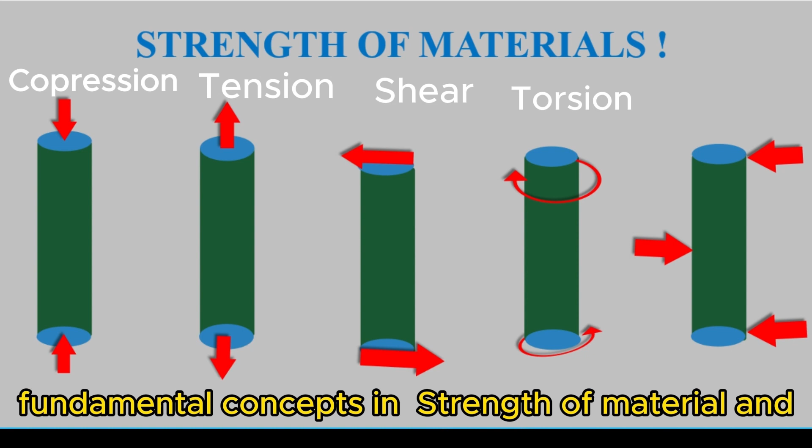Today we are going to see what strength of materials is, fundamental concepts in strength of materials, and finally its application area. I hope you will get important tips about the subject.

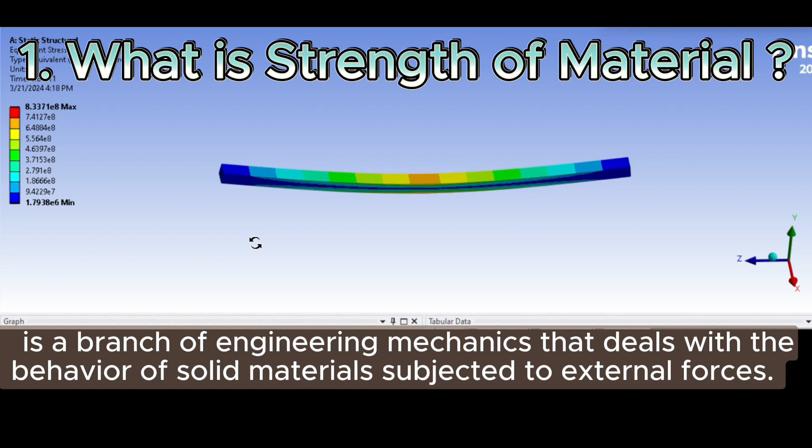In the first section we will see what is strength of materials. Strength of materials is also known as mechanics of materials. It is a branch of engineering mechanics that deals with the behavior of solid materials subjected to external forces. It focuses on understanding how materials respond to loads and stresses and how they deform and fail under different conditions.

The primary objective of strength of materials is to analyze the internal stresses and strain within a material and assess its structural integrity and performance.

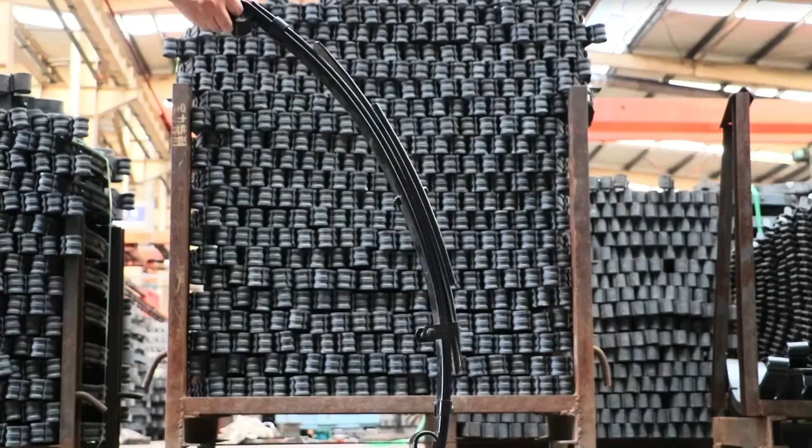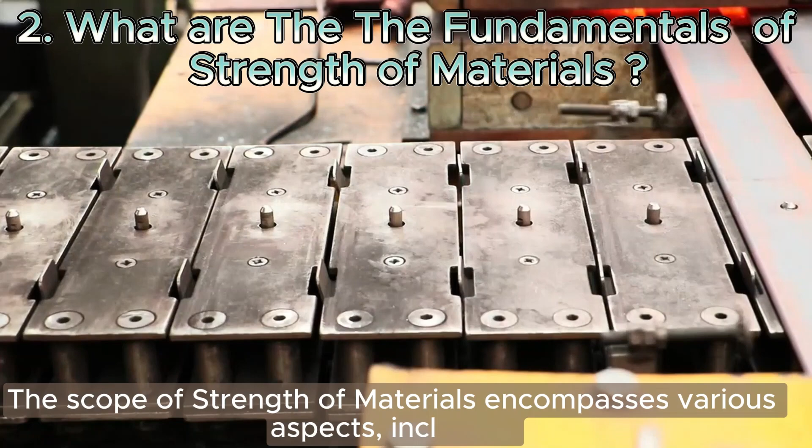In the second section, what are the fundamentals of strength of materials? The scope of strength of materials encompasses various aspects, including stress analysis. Strength of materials involves the analysis of internal stresses that develop within a material when subjected to external forces.

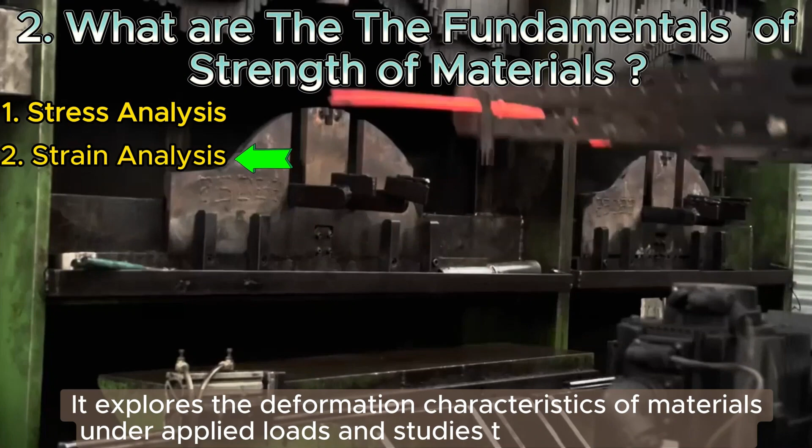The second one is strain analysis. It examines the distribution of stress and their effect on materials' behavior, such as deformation, stress, strain, and failure. It explores the deformation characteristics of materials under applied loads and studies the resulting strains. Strain analysis helps in understanding the material's response to external forces and provides insight into its mechanical properties.

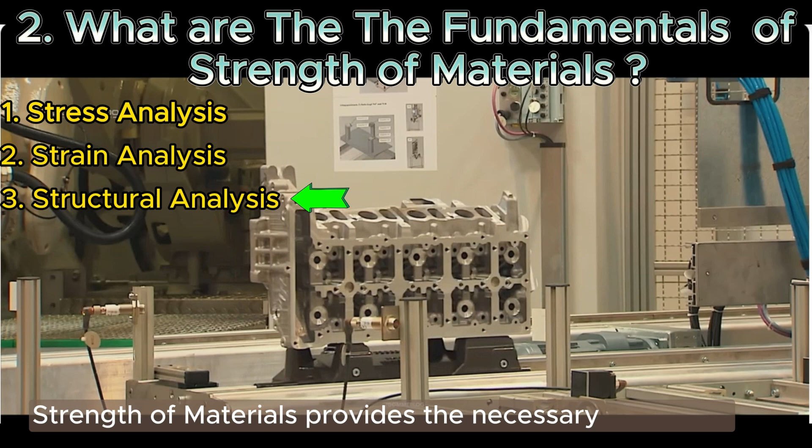The third one is structural analysis. Strength of materials provides the necessary tools and techniques to assess the strength and the performance of structures, such as beams, columns, shafts, and plates.

The fourth one is design and optimization. By understanding the behavior of materials under various loading conditions, strength of materials assists us in design and optimization of structures and mechanical components. It is helpful to select appropriate materials, dimensions, and configuration to ensure structural integrity and efficiency.

Fifth one is failure analysis. Strength of materials investigates the causes and mechanisms of material failure, such as fracture, fatigue, and creep. It aims to identify the factors that lead to failure and determine ways to prevent or mitigate them in engineering design.

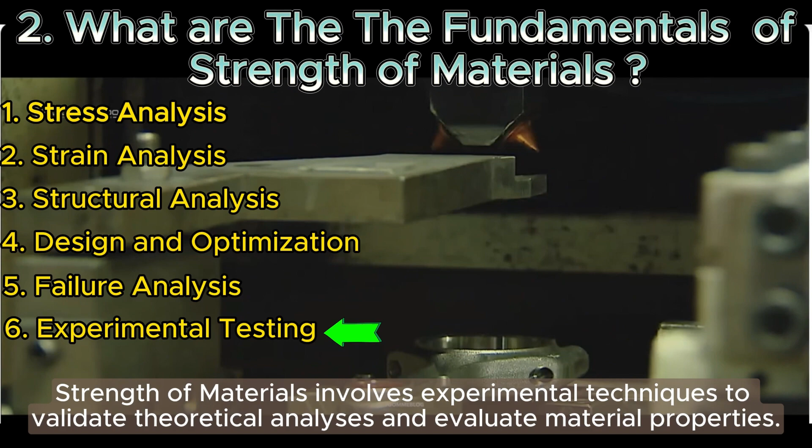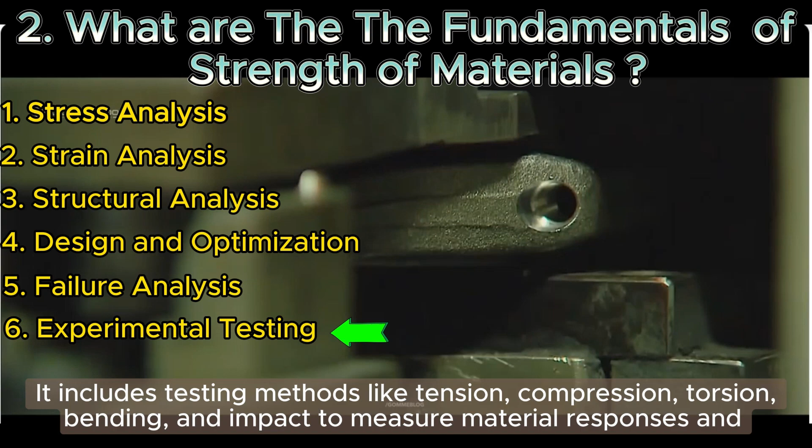The sixth one is experimental testing. Strength of materials involves experimental techniques to validate theoretical analysis and evaluate material properties. It includes testing methods like tension, compression, torsion, bending, and impact to measure materials' response and obtain data for design and analysis.

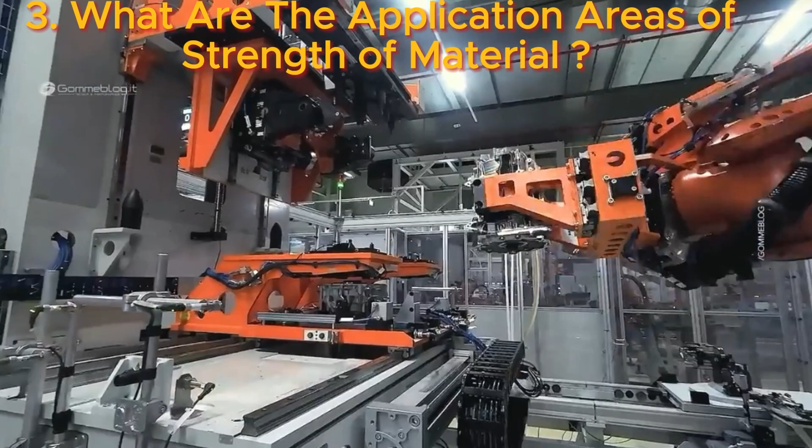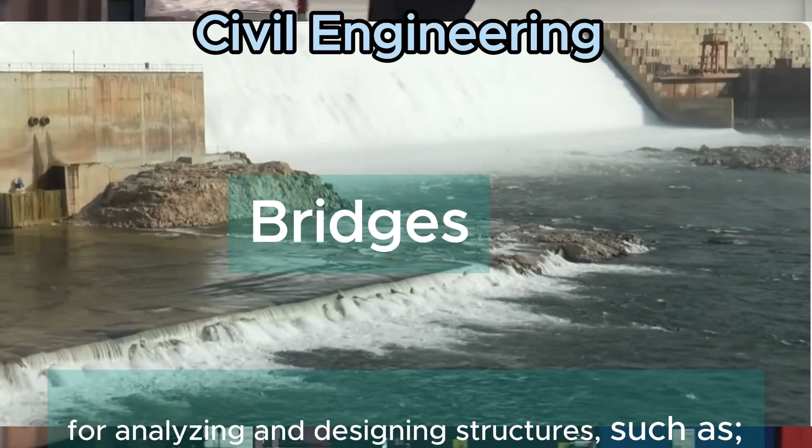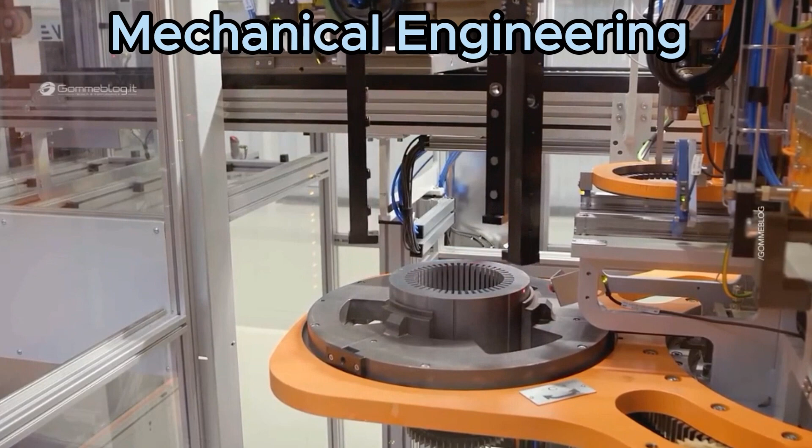The third one is what is the application area of strength of materials. Strength of materials is crucial in civil engineering for analyzing and designing structures such as buildings, bridges, dams, and tunnels. The other application is in mechanical engineering. In mechanical engineering, strength of materials is used to analyze and design mechanical components and machines.

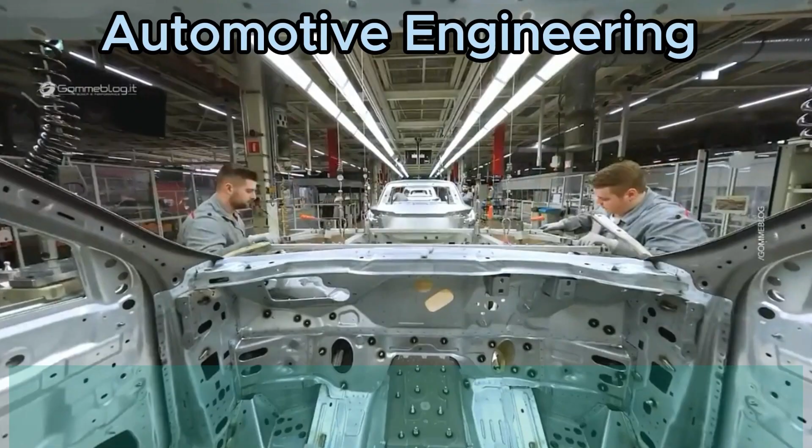The other is in aerospace engineering. Strength of materials plays a significant role in aerospace engineering for design and analysis of aircraft, spacecraft, and related components. In automotive engineering, it utilizes strength of materials principles to design and analyze various components of vehicles, including chassis, suspension systems, and engine parts.

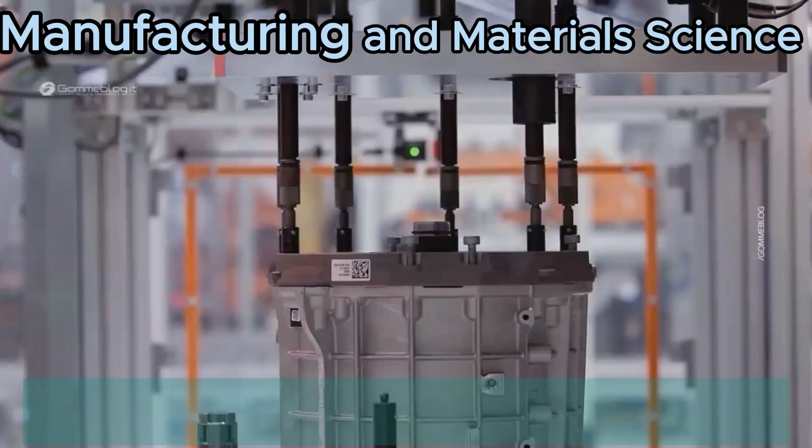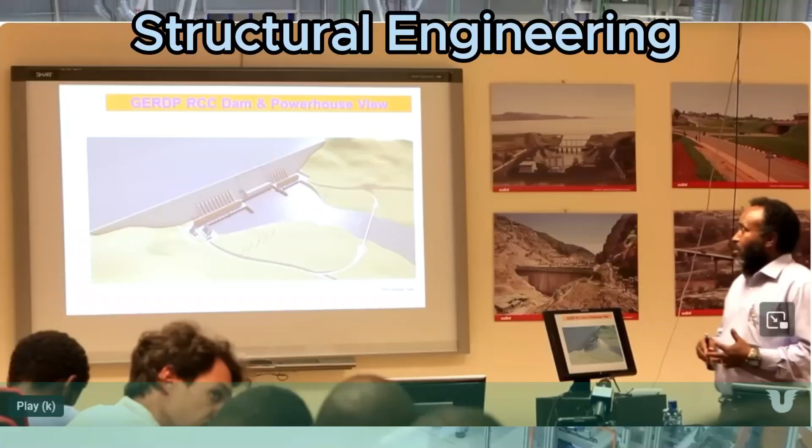The other application is in manufacturing and material science. Strength of materials is relevant in manufacturing processes such as forming, machining, casting, and welding. The other application is in structural engineering. Strength of materials is fundamental to structural engineering, involving the analysis and design of large-scale structures like skyscrapers, stadiums, and offshore platforms.

In material selection and design, strength of materials assists us in the selection of appropriate materials for a specific application based on their mechanical properties. It helps us to choose materials that withstand anticipated loads, stresses, and environmental conditions, leading to efficient and reliable designs.

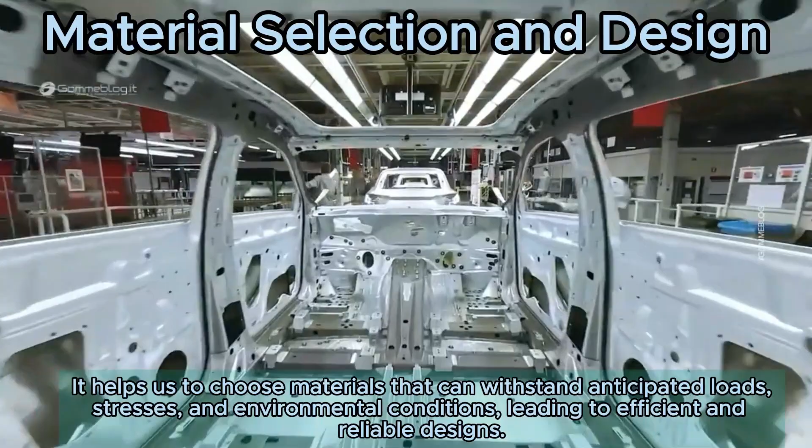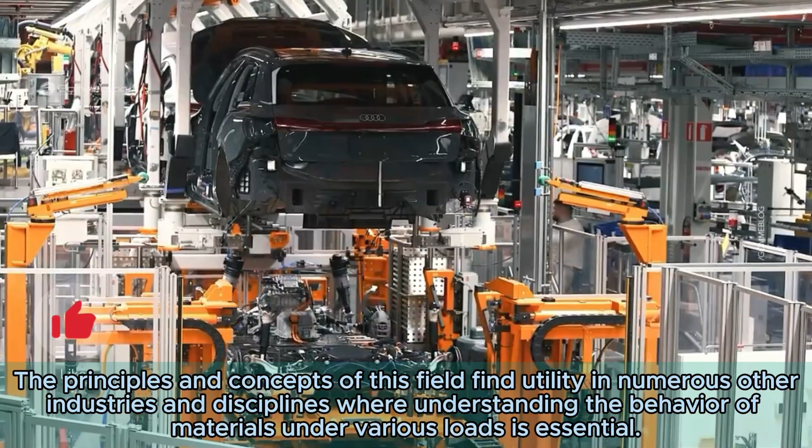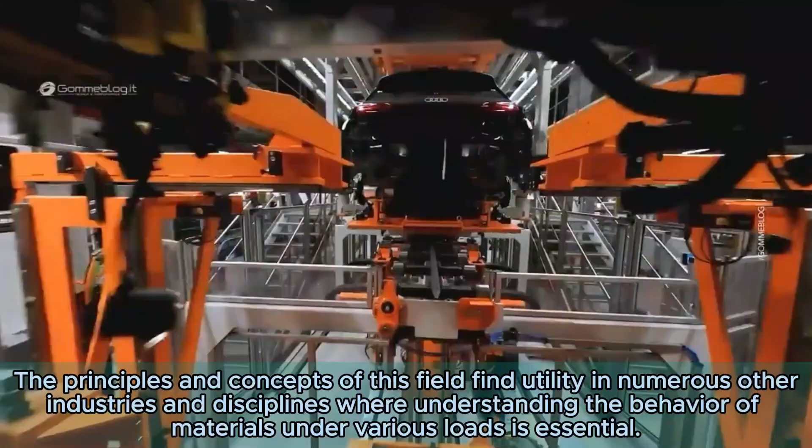These are just a few examples of the application area of strength of materials. The principles and concepts of this field find utility in numerous other industries and disciplines where understanding the behavior of materials under various loads is essential. Well, this is all about lecture 1 of the introduction section.